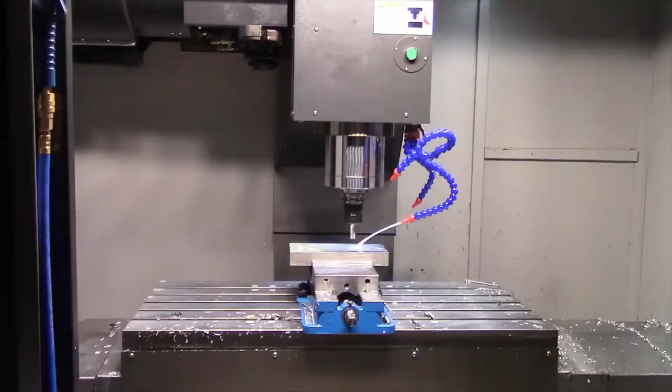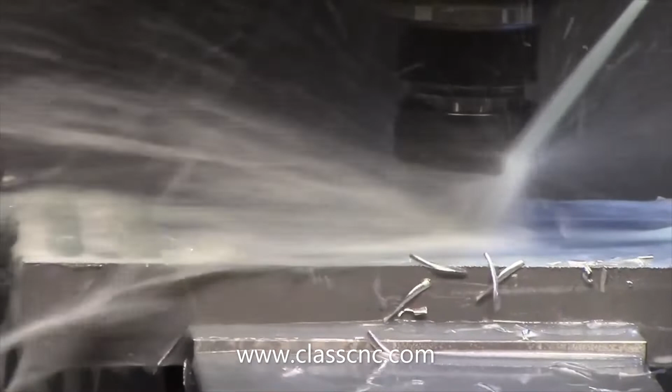DM's newly released Machining Center line is the most modern and user-friendly CNC on the market, with built-in CAD CAM right on the machine. Machining Center mechanical design has been refined for decades, which means Machining Center OEMs all produce very similar base machines.

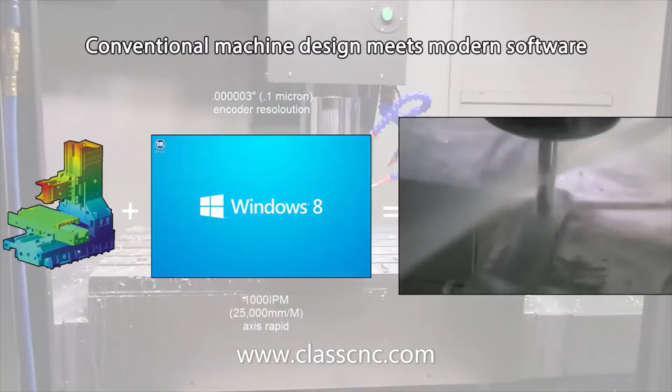We bring conventional Machining Center design into the 21st century with modern software that runs on modern PC hardware and the latest in CNC technology, utilizing AC brushless servo motors with 0.000003-inch high-resolution encoders and 1,000-inch per minute rapids. This drives an increase in productivity whether you're a beginner, intermediate, or CNC expert.

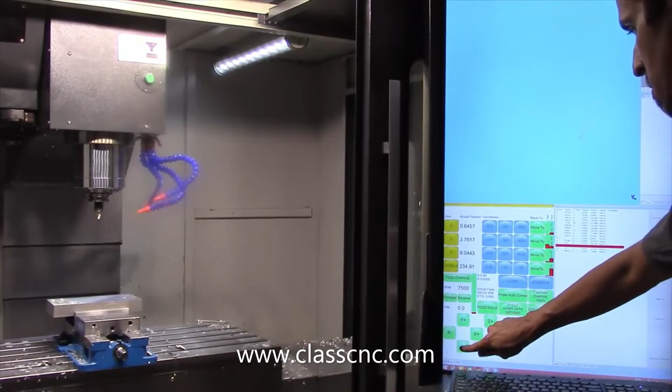Our built-in high-resolution 39-inch touch monitor is a key part of interacting with the machine, giving you plenty of screen space to interact with the machine how you want to. In today's modern world, it's all about how much information can be displayed at once, and only large high-resolution monitors can provide this. Unlike fixed button operator panels, our screen layout can be customized to show what the operator wants to see.

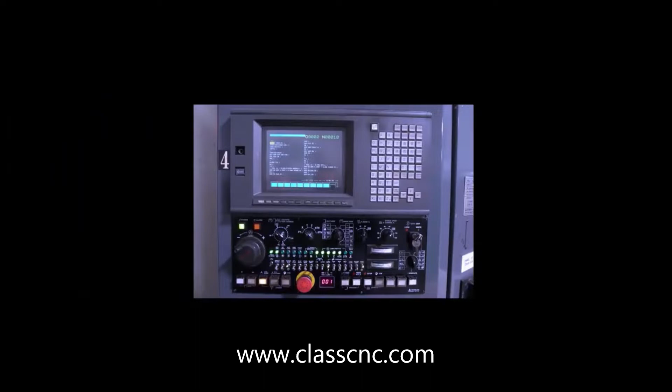Gone are the days of trying to remember cryptic keystrokes and codes in order to make the machine perform the way you want it to. Our Windows-based software means that anyone who can use a computer can also operate a DM Machining Center in either G-code or DM CAM mode.

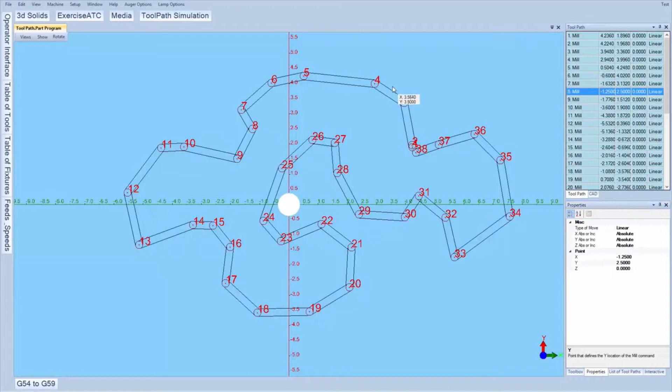The simplest of programs starts by right-clicking on the 2D graphics screen. Every time I click, it adds a new XYZ mill point in my toolpath list. I can select any of these points to enter an accurate XYZ value, or drag them around on the screen. Then go to the operator's interface and press cycle start, and the machine will go to each of these points.

Say I want to drill a hole at each of these locations. I can just add a peck drill instruction before the mill points and change it to modal. Then press go again and it'll drill a hole at each of these locations.

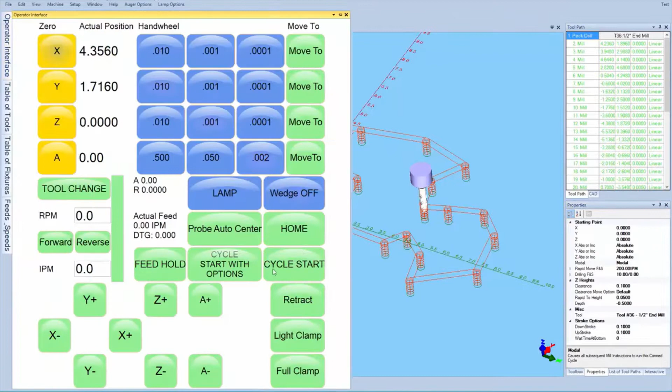If we want to drill then tap, I leave the peck drill in place and enter a tap instruction. Then set my thread pitch and hit cycle start again. Now each location will be drilled, perform a tool change, then tap each location.

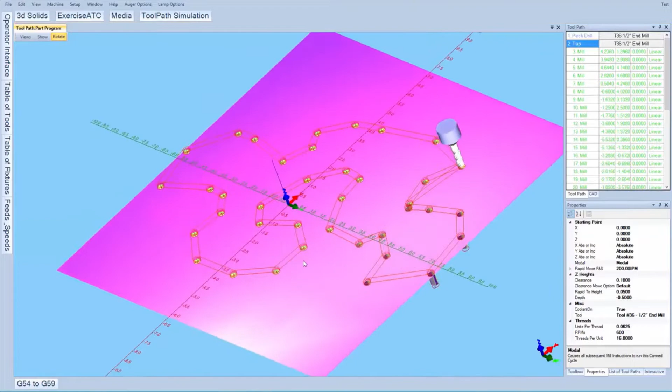You can verify that your program will cut properly before you run it. Just press generate solid on the touchscreen and you'll see what will be cut. And here you can see, we're pre-drilling a few holes with the 21/32 drill, which the machine will then tap with a 3/4 inch tap.

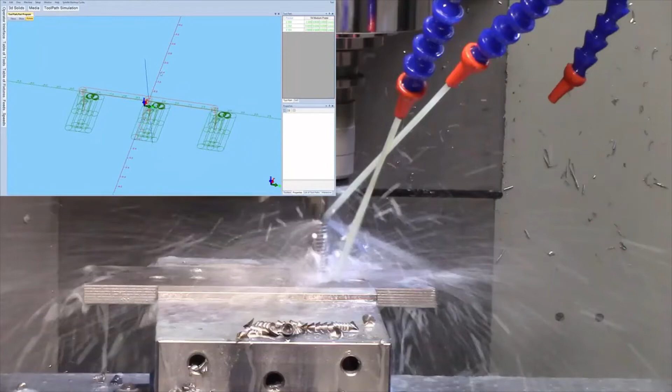Any of our canned cycle instructions can be repeated in the same way, such as pockets, circular interpolation of existing bores, surfacing operations, true type engraving, and many more instructions can be repeated the same way.

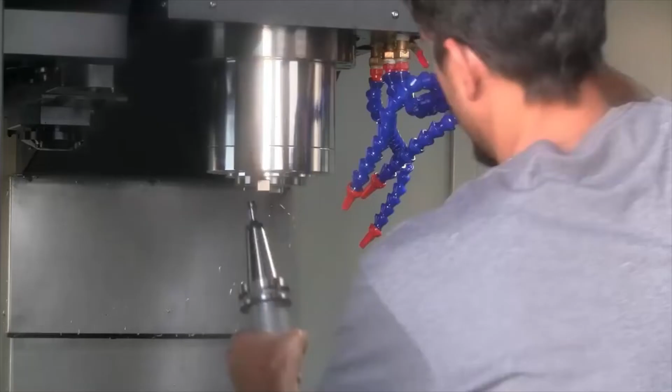And don't let the automatic tool changer scare you. It's easy to operate. Just manually load any tool into the spindle, like this tapping head. Then select the tool number and press Load Tool into ATC. The machine will then put the tapping head away in the selected pocket. Anytime you want to use the tapping head, just select it from the list and press Set Active or run a program that uses the tapping head.

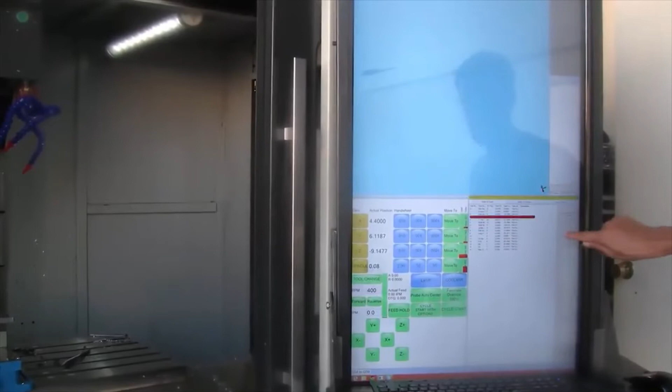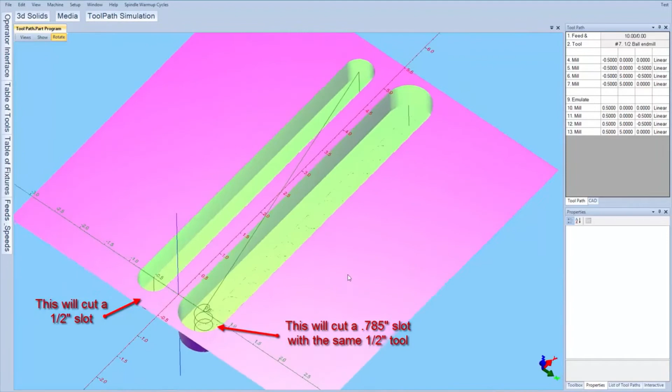Using our Emulate Tool Diameter instruction, the software will automatically interpolate small scallops using a smaller tool to emulate dimensions that a larger tool would naturally cut. This allows you to crank up the feed and speed and simplifies cutting many shapes such as an odd-sized slot. Our Emulate Tool Diameter can be used on any existing G-code or online program.

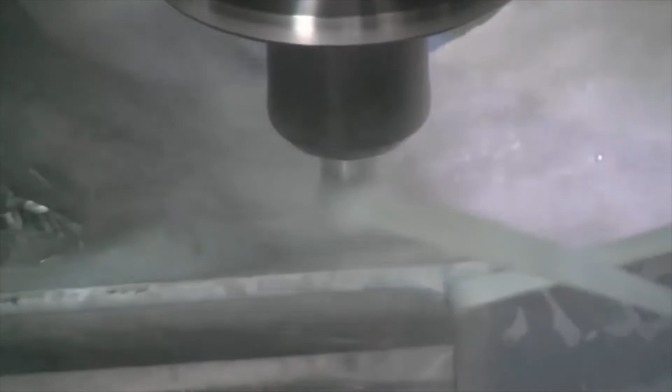Our Probe Auto Center feature allows the operator to find zero and measure parts with the probe. For instance, to find the center of a hole, just move the probe inside of the hole and press Probe Auto Center. Make sure the inside diameter option is selected, then press go. The probe will touch the 4 sides of the hole and then move to the true center that it found.

Then the operator can decide what to do with that location. For instance, you can zero the machine there, or you can record that point into your program, or use the displayed coordinates from your readout however you'd like. There are many other common probe auto center operations, such as outside diameter, slots, corners, and more. Here's what a depth probing operation looks like.

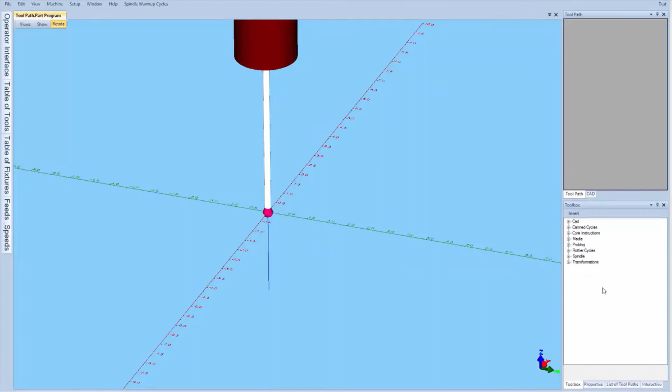The probing ability doesn't end there. You can start probing a 2D profile in a matter of seconds. Just insert a probe profile command and place the probe to the left of the part. Then press cycle start and the machine will digitize points 360 degrees around the perimeter of your part.

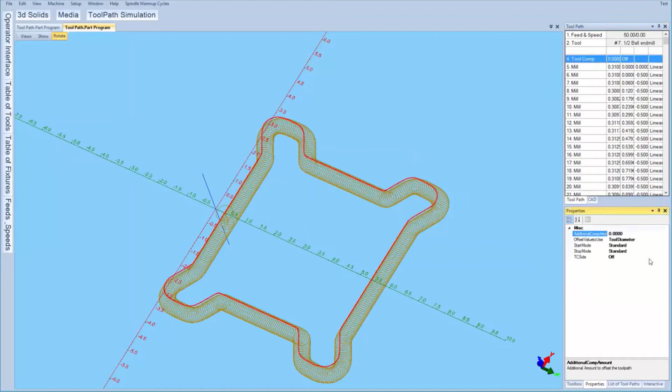A part this size will take just a few minutes. When it's all done, the points can be tool compensated for any tool diameter. You can duplicate your part or cut the mating profile. You can also perform a random pocket operation to clear out the entire profile.

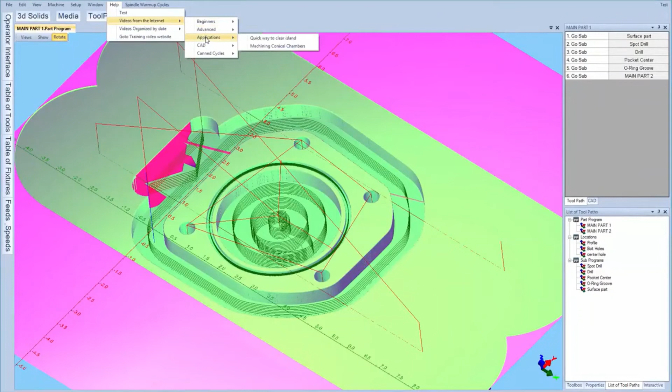DM has invested in modern internet support systems. Our entire training library is online in streaming video format and accessible from the machine in the help menu or the dmtube.com website for desktop access. Our videos cover every aspect of programming and operating your machine.

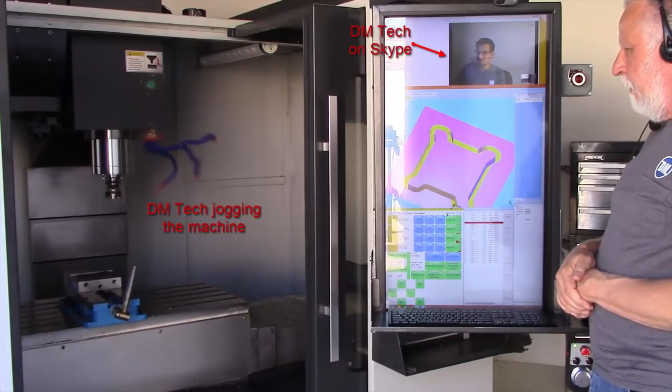A DM tech can log in remotely using industry standard LogMeIn software and in a matter of seconds operate every aspect of the machine as if he were right in front of your machine. That's right. No more trying to explain and understand what is on your screen or where to click next. We can do it for you.

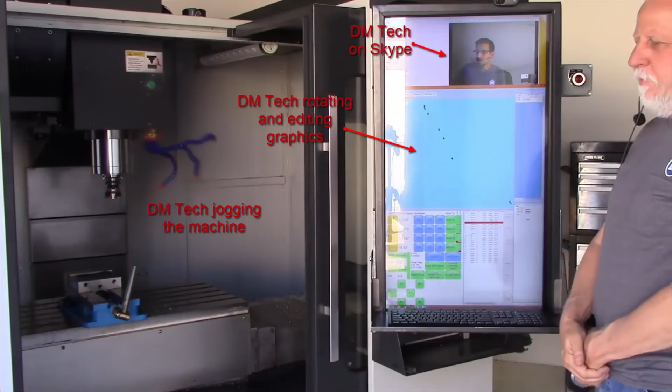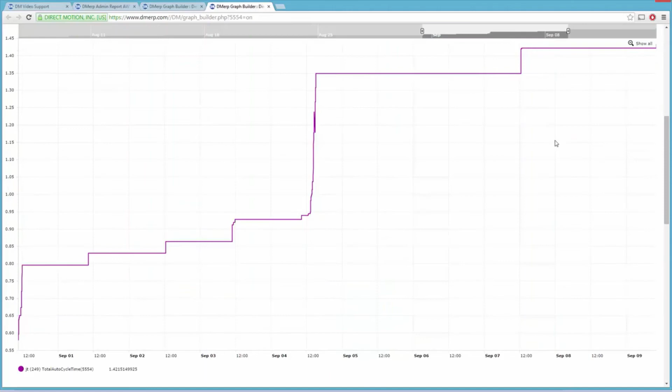Technology is amazing, and our Windows-based control allows DM customers to benefit from these advantages in technology. Every machine comes with a username and password to log into your dmerp.com account. Here you can view the entire history of your machine, from axis temperatures to auto cycle runtimes and much more.